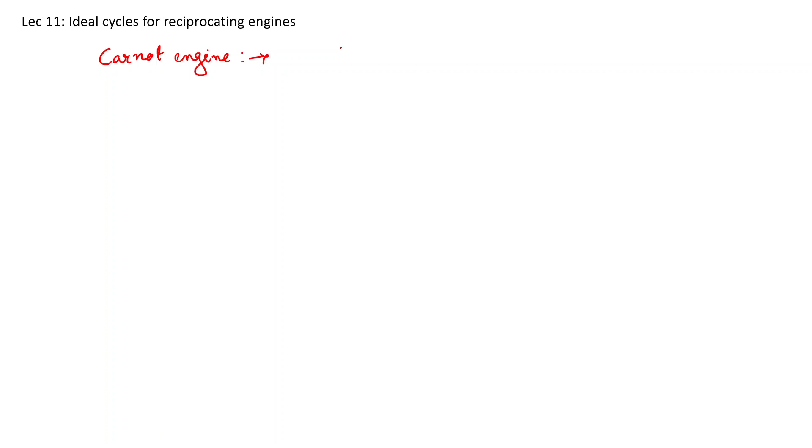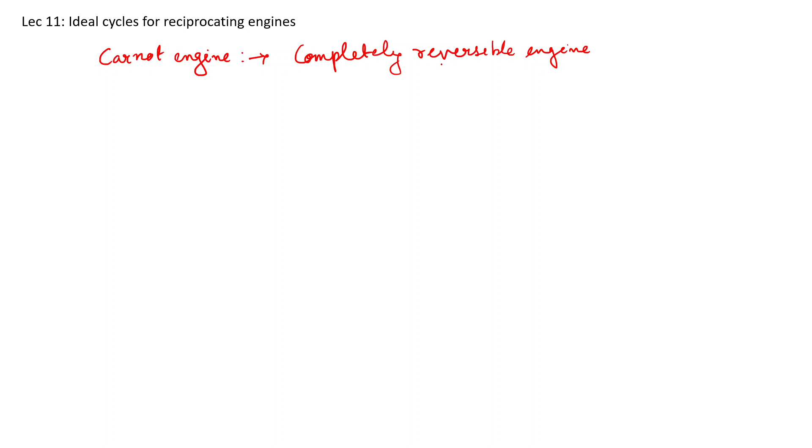When we are talking about ideal cycles, although we are not stating it, these are completely reversible. There are two types of irreversibility: internal irreversibility and external irreversibility, which has been discussed very vastly in the lectures covered by the instructor.

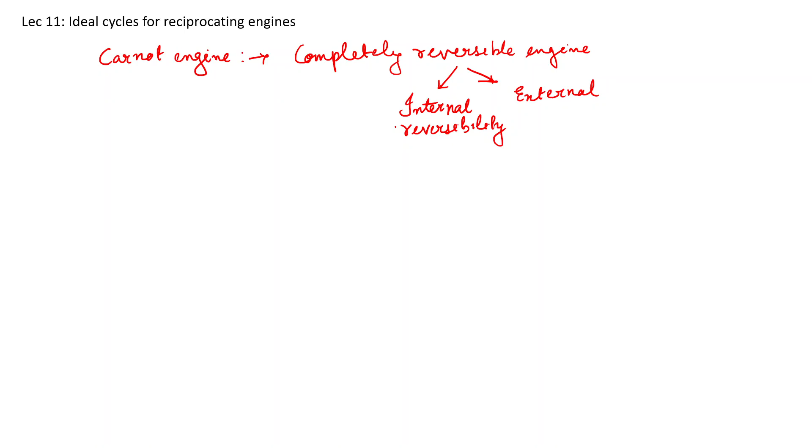Whenever we are not considering internal irreversibility in an engine, then there comes the ideal cycles, which has a presence of external irreversibility. Now, external irreversibility is due to the temperature difference existing between two bodies, which has a finite temperature difference.

Now, what will happen if there is a temperature difference? If there is a temperature difference, there will be a heat transfer, which will cause various forms of energy transfers. When we are talking about any reciprocating engine, there are various processes taking place which are not practically possible to identify. That is why we want to somehow replicate the actual cycles taking place in a reciprocating engine by replacing them with some ideal processes.

For example, the suction process may not be constant pressure. There might be other reversible or irreversible things, like pressure drop, or even heat transfer. But when we are talking about the ideal cycle, we don't consider all the irreversibilities. We neglect the internal irreversibility and try to identify the different performance parameters.

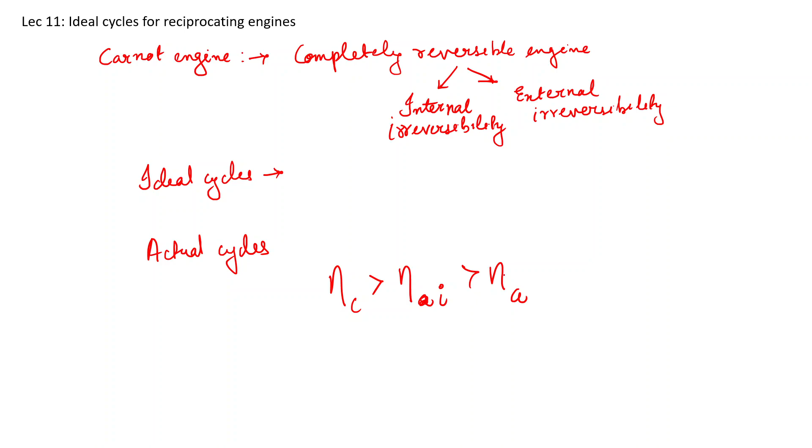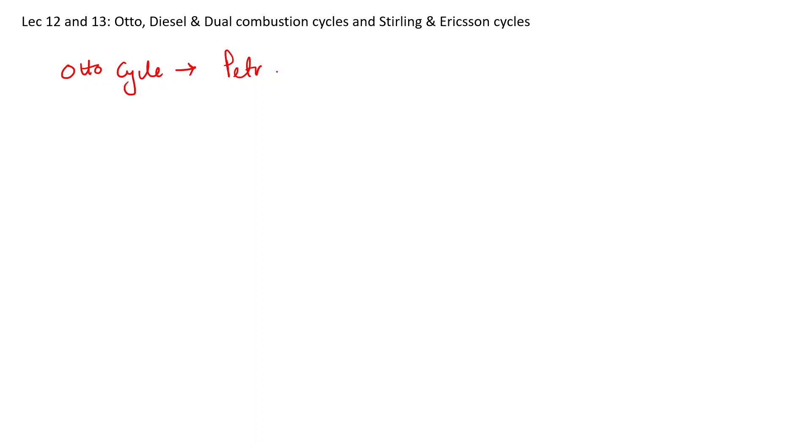Based on that, the different types of cycles we have discussed till now, in lecture number 12 and 13, the first one is an Otto cycle, which is generally found in the petrol engine or SI engine.

Then the other cycle is the diesel cycle. As the name suggests, it is used for the fuel diesel engine, also known as CI engine.

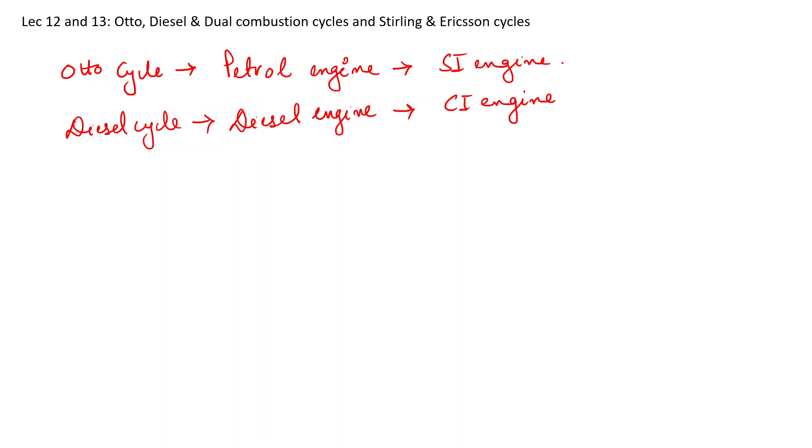The Otto cycle also has some disadvantages and some promising things. So when we combine the advantages and disadvantages of both the Otto and diesel cycle, we get another cycle known as the dual cycle, which will generally exist between the Otto cycle and the diesel cycle. These are the modern day engines.

Now, other than that, we have already discussed Stirling engines and Ericsson engines.

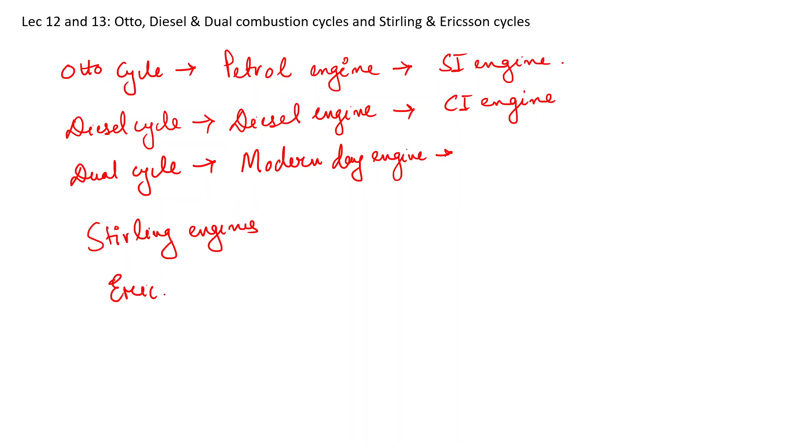Now, this type of engine is generally found in power cycles or whenever we are dealing with any huge reservoir, like a heat recovery system or renewable thermal systems. This type of engine cycle is used there. You can find more about this on Google by searching Stirling engines. You can find out that Stirling engines are also used in solar thermal power plants.

Now, what are the processes involved? I think you might already know this, but I'll brief them. There are two isentropic processes and two isobaric... sorry, isochoric processes. Petrol engine is isochoric, constant volume processes.

Now when it comes to the CI engine, the isentropic processes stay the same. In place of one of the isochoric processes, that is the heat addition, heat addition is done here using isobaric process, where the pressure stays constant.

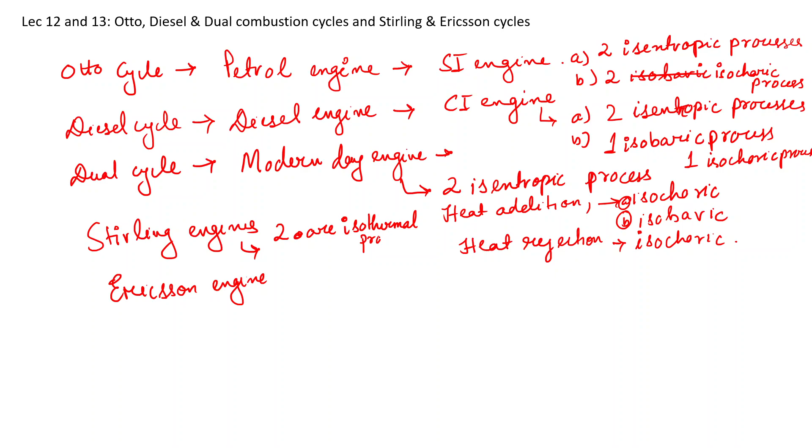Now the Stirling engine somewhat resembles the Carnot cycle, where two of the processes are isothermal and two are isochoric. Now, in place of the two isochoric processes, here the two are isobaric.

So these were all the things discussed this week, and based on that there were a few derivations done on how to identify the efficiency of these engines. Mostly we discussed Otto, diesel, and dual cycle, and after that we also saw how different state points can be found out, assuming these are air standard cycles and air is an ideal gas. We used ideal gas equations to identify the state points - temperature, pressure, and volume. Based on that, we find three or four important things: thermal efficiency, mean effective pressure, or specific volume. We'll be discussing these and solving a few numericals which will be helpful in understanding these types of cycles.

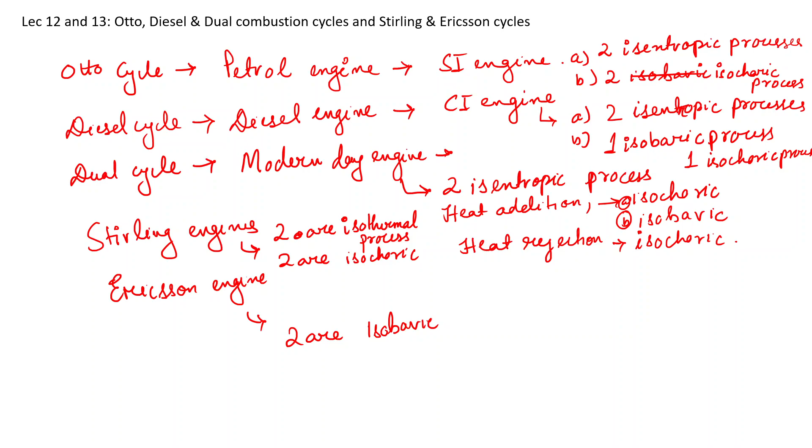Okay, so let's start solving the numericals. Okay, so can you see the screen?

The first question is: compression ratio of a reciprocating engine is defined as the ratio of... tell me. Maximum to minimum volume, sir. Correct.

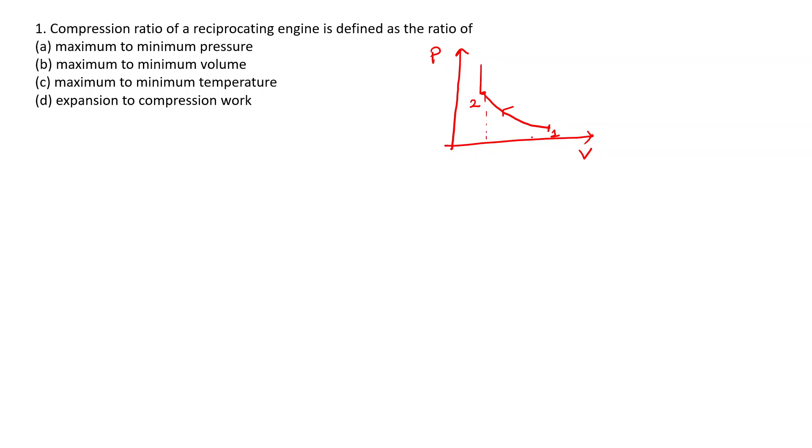This asks for any reciprocating engine, but for instance we can take an Otto cycle. If this is a P versus V curve for the Otto cycle, let's say first 1 to 2 is isentropic compression, where we reach from volume 1 to volume 2. Then the constant volume heat addition, then the isentropic expansion, then finally the isochoric heat rejection. Now V2, this much is VC, the clearance volume, and this part is Vs, the swept volume.

Based on that, we can also say that whenever we talk about any engine, if the piston is at its lowest point, that is BDC, and when it is at the highest point, that is TDC, and this much volume is the clearance volume - this has been discussed in the lecture as well. So the compression ratio is the ratio of the maximum volume, that is the volume at BDC, to the volume at TDC. So it is V1 by V2.

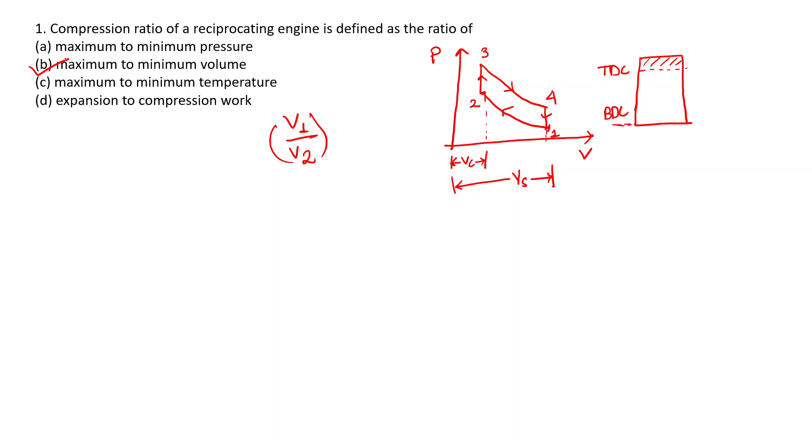So we'll move ahead. Okay sir. So the next question is: an Otto cycle is characterized by what? We have just discussed this. Isochoric heat addition and isochoric heat rejection. Correct.

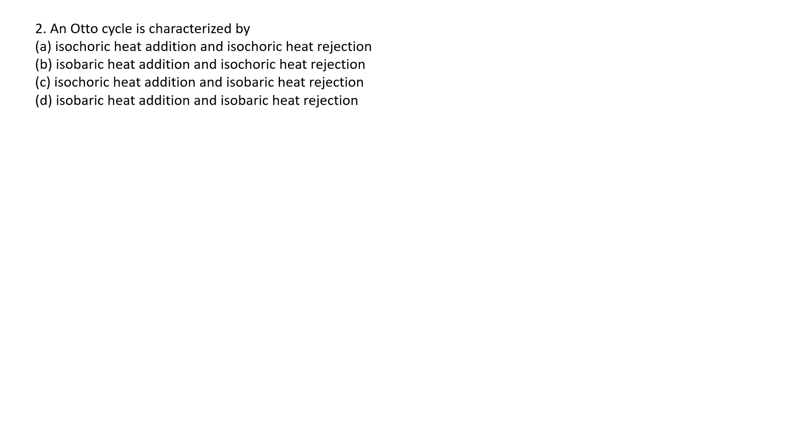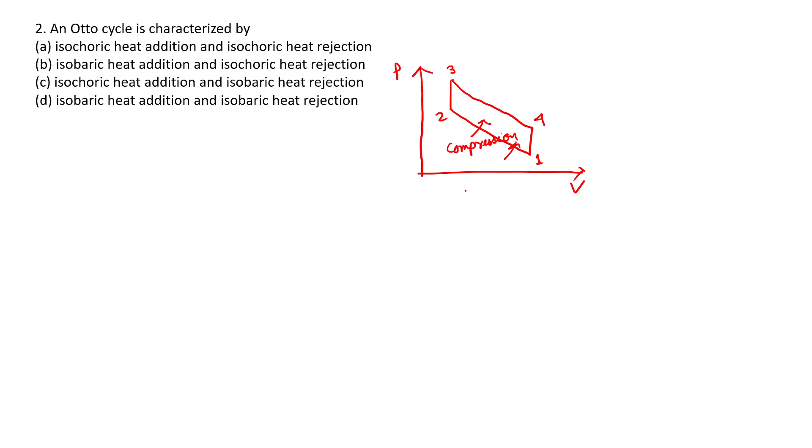I just drew the PV diagram of the Otto cycle. Now here there is compression, isentropic compression, where work will be done on the system. Then comes the heat addition - 2 to 3 is the isochoric heat addition term, where there is Q supply. Then comes the work done by the system - there will be expansion, isentropic expansion done by the system. Then finally heat will be rejected, and that is isochoric or constant volume heat rejection. This is all about the Otto cycle, and based on that, the correct option is isochoric heat addition and isochoric heat rejection, option A.

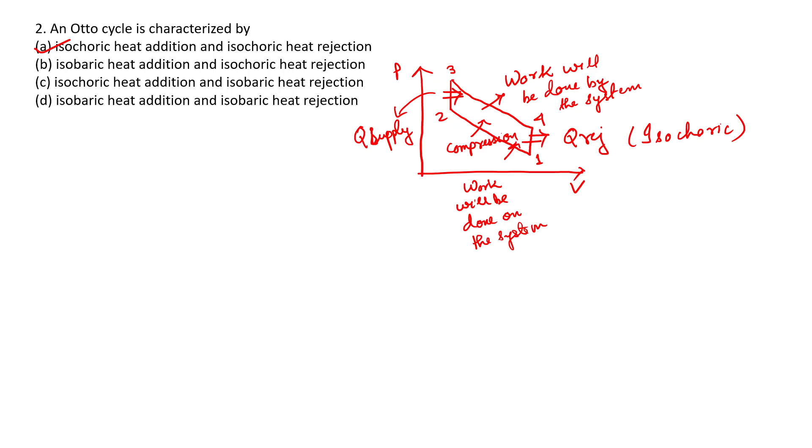So we'll move to the next question. Yeah, so the thermal efficiency of an Otto cycle is - if you remember the thermal efficiency formula, you can directly answer from that.

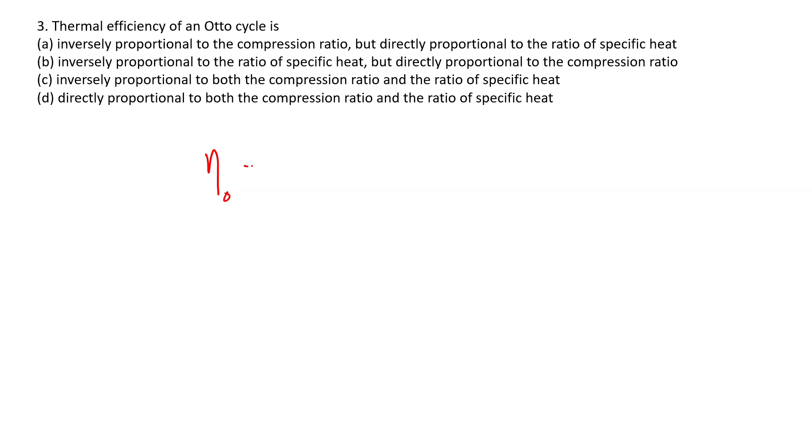Yes sir, that is 1 minus 1 by compression ratio power gamma minus 1. 1 by RC, let us say compression ratio is RC, gamma minus 1 by gamma.

Okay, so now tell me, for example, if you are increasing RC, what will happen to the efficiency of the Otto cycle?

Yes sir, gamma for a monoatomic gas is like 1.67.

So absolutely right. So already a graph was discussed, a plot where the x-axis has the RC and the y-axis has efficiency. Now RC cannot come below 1, so this is the curve that was discussed.

Okay, now along this gamma increases. This, as you said, is for gamma equal to 1.66, that is monoatomic gas. This is 1.4 and this is 1.3.

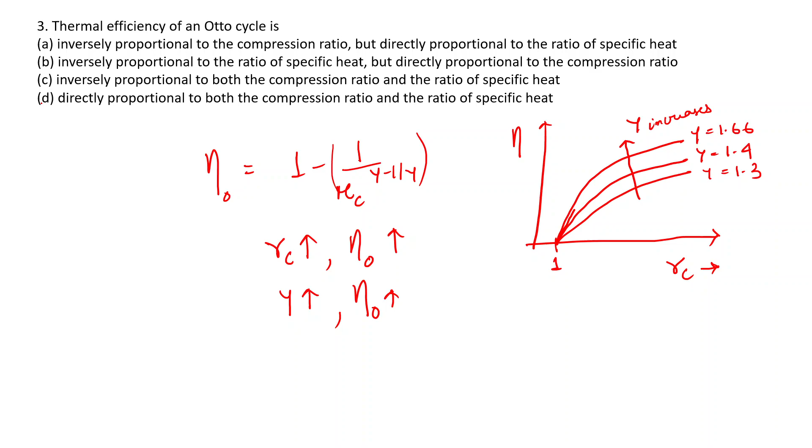Okay, that is one of the drawbacks, and based on that only we switch to diesel cycle. So the correct option is directly proportional to both compression ratio and the ratio of specific heats, that is gamma.

Question number 4: just now we discussed, an Ericsson cycle comprises of what? Two isothermal and two isobaric processes. Correct. So 2 isothermal and 2 isobaric processes I have already discussed, and you can refer to lecture number 13 to understand more about it.

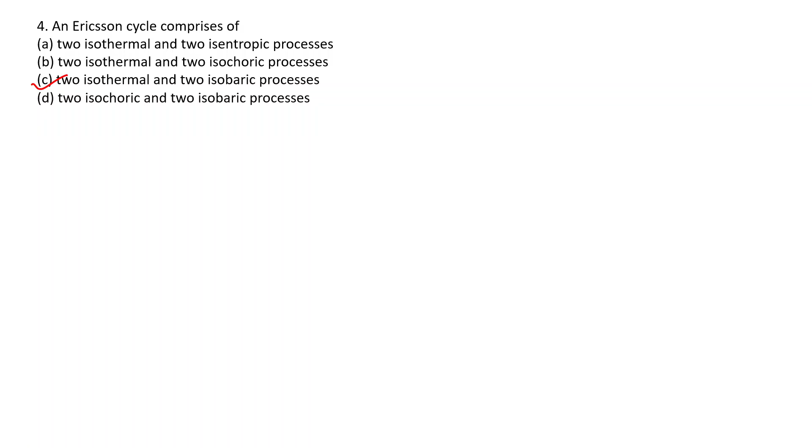Now coming to solving few numericals, let's start with question number 5. An engine running on Otto cycle receives air at 85 kilopascal, 280 Kelvin, with the maximum cycle pressure and temperature as 5 megapascal and 2000 Kelvin respectively. The temperature at the end of the expansion stroke is dash Kelvin. So try to solve this question, and then we can discuss what value you got.

In this problem, shall I take P2, pressure after compression, which is equal to square root of P1 P3? For Otto cycle, is it applicable sir? That can only be applicable when the condition is that you are talking about when there is minimum compression work. I think that formula, root over P1 and P3, is used in a compressor.

Okay, so here you can't use that formula because no such consideration has been mentioned in the question. So you have to start by using the state points. What are the state points? Whenever such a question is given, consider what state points have been provided and what information I can derive from the question. The third thing is, based on that, what missing state points do I need to find out. After that, you can find out the efficiency or whatever it is asking. So just go step by step, you will be able to answer this question.

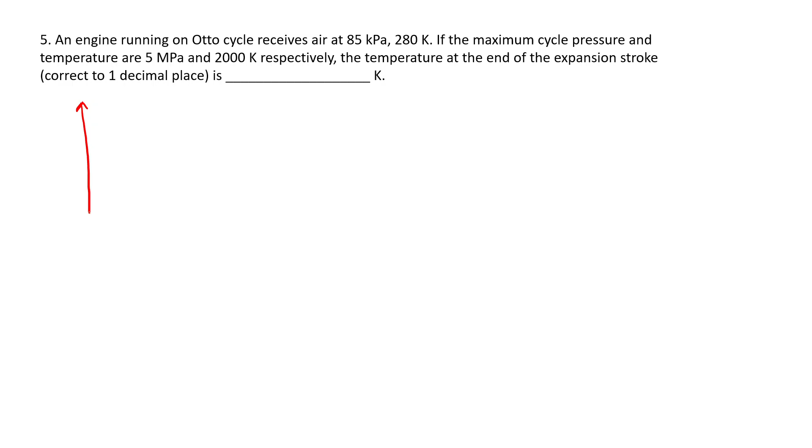Okay then, I will solve this question. So what are the hints we have to find out? First of all, as I said, draw the curve, either whatever you are comfortable with, whether it's P versus V or T versus S.

Okay, so at state point 1, P1 is equal to 85 kilopascal, T1 is equal to 280 Kelvin. These are the things that have been given.

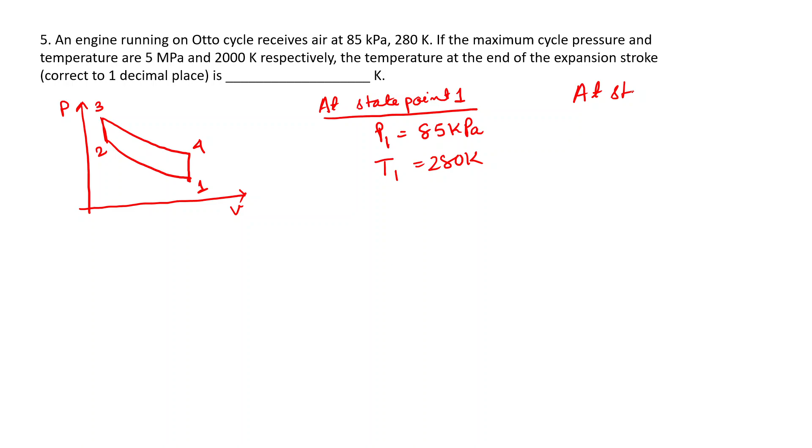At state point 3, P3 is equal to 5 megapascal or 5000 kilopascal, T3 is equal to 2000 Kelvin. It is asking what is the unknown, it is asking what is T4.

Now, one of the hints you might have skipped is the Otto cycle term. What does Otto cycle mean? That means V2 is equal to V3. This gives a very important relation, that is P2 by T2 is equal to P3 by T3. Similarly, V3, V4 is equal to V1.

So P4 by T4 is equal to P1 by T1. Okay, now let's find what is T2.

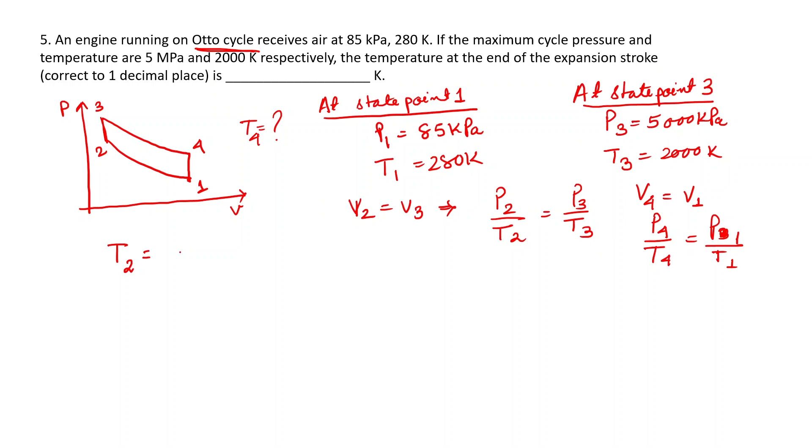Now T2 is equal to, we'll use the adiabatic equation, PV to the power gamma is equal to constant. If you cannot remember the equation, just remember PV to the power gamma is equal to constant. Based on that, replace P with V with respect to T and P relation: T by P to the power gamma minus 1 over gamma is equal to constant.

So that implies T2 by T1 is equal to P2 by P1 to the power gamma minus 1 by gamma. So T2 will be T1 into P2 by P1 to the power gamma minus 1 by gamma.

Now in this case, we don't know what is T2, we also don't know what is P2. Okay, that's fine. But what we know is T1 and P1. Now coming to the next equation.

That is P2 by T2 is equal to P3 by T3. So in place of P2, just write P2, and in place of T2, replace with this equation: T1 into P2 by P1 to the power gamma minus 1 by gamma is equal to P3. Do we have P3? Yes, we have P3, it is 5000.

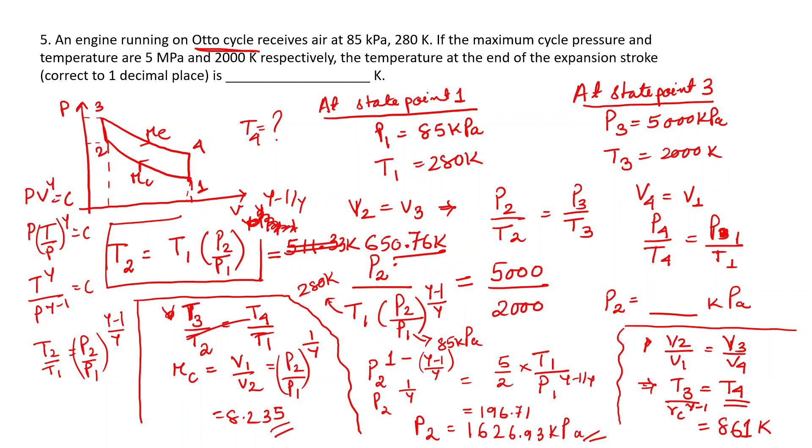Okay, so this is how we solve it, just go step by step. Now question number 6: A gasoline engine with a compression ratio of 10 receives air at 50 kilopascal, 280 Kelvin. Temperature at the expansion stroke is 750 Kelvin. If air can be assumed to be an ideal gas with R equal to 0.287, find the mean effective pressure of this cycle. I think you can give it a try.

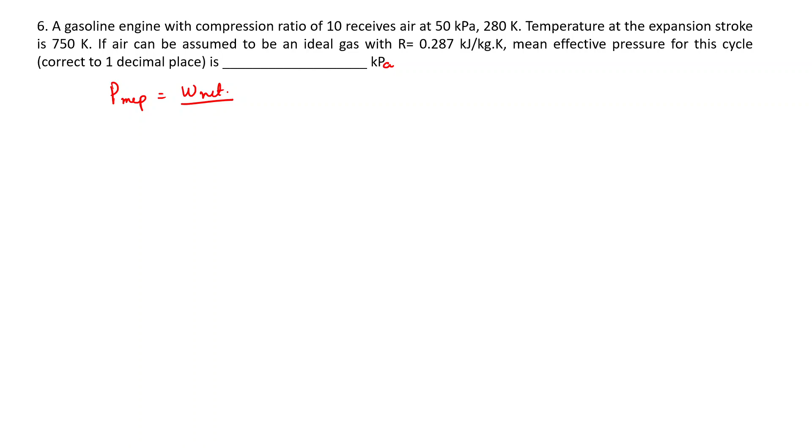As per the mean effective pressure definition, that is equal to net work done divided by V1 minus V2. Not only work done, net work done, because net divided by Vs, or you can write W net by V1 minus V2. This is the swept volume.

Here heat supplied minus heat rejected: CV into T3 minus T2 for finding the heat supplied. Meanwhile heat rejected is CV into T4 minus T1. We need to find the salient state points. Let's go for it.

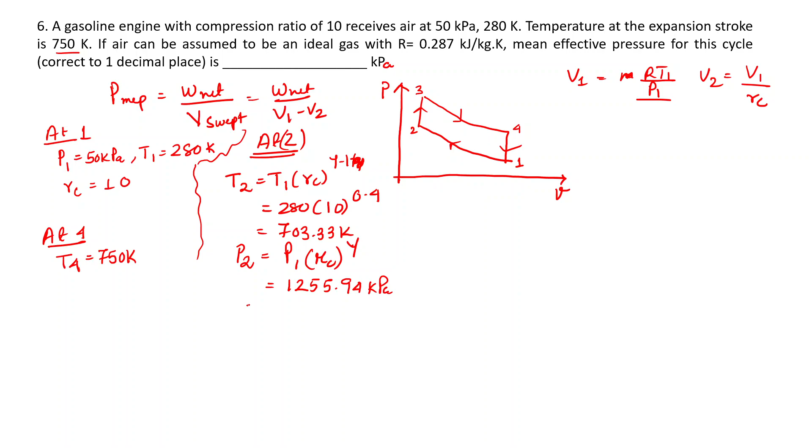1255.94 kilopascal. So based on the information we calculated, what are the state points at 2?

One more thing we can calculate now is V1, the specific volume at state point 1. We calculate it by RT1 by P1, where R is not the universal gas constant but the universal gas constant divided by the molecular mass of air, which is given as 0.287. So 0.287 into T1, which is 280 Kelvin, divided by P1, which is 50 kilopascal, gives 1.6072 meter cube per kg.

Let us take 1.6072 as 1.61 meter cube per kg. From here can you calculate V2? Of course you can. It is 0.16 meter cube per kg.

Now the effective mean pressure is W net by V swept, that is V1 minus V2. So V1 and V2 we have, we need to find W net. One of the easiest ways to find it is to find efficiency, because this is an Otto cycle.

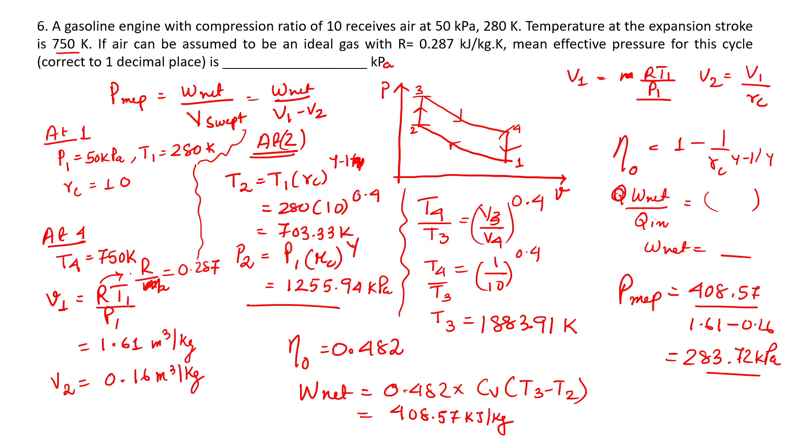Now coming to the next question. An Otto cycle with a compression ratio of 10 receives air at 290 Kelvin and 85 kilopascal. If the peak pressure is 6000 kilopascal, find its highest temperature. Almost similar question, try to solve it, then I will solve.

First step, draw the curve, okay sir. Yeah, first step draw the curve. I am comfortable with the PV curve, so whatever you are comfortable with, just draw that.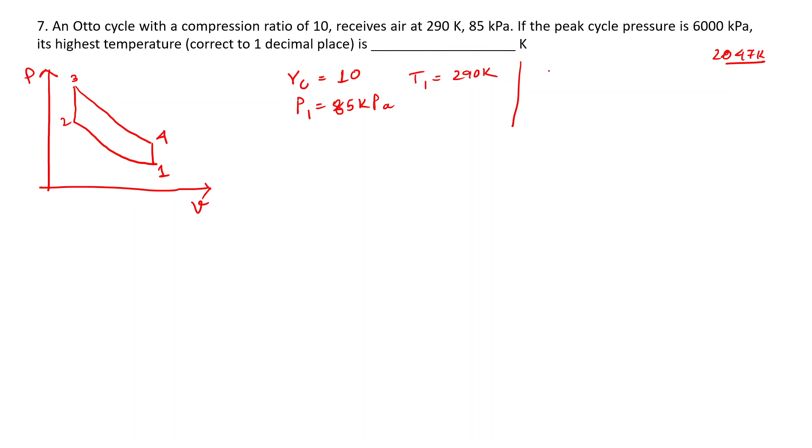So in an Otto cycle, where is the peak pressure? We see it at state point 3. So at P3 it is saying 6000 kilopascal. So it's the same question, we have some of the salient features or state points missing.

So let's start with finding out what we need, which is T3. So start with finding T2. T2 is, we have already developed this formula, RC to the power gamma minus 1. So T1 is 290 Kelvin, RC is 10 to the power 0.4.

If possible, try to remember this, because mostly whenever you get any Otto cycle question, the compression ratio is 10. So it's better to remember what 10 to the power 0.4 is, then your calculation will be really fast.

So it is around 2.5, 2.51, or you can just remember 2.5. So into 290, I am getting 728, 728.44 Kelvin, correct? Now once T2 is done, we need to find out T3.

So it is constant volume process. So T3 by T2 is equal to P3 by P2. Do we have P2? We don't know P2. Now how to find out P2? P2 is P1 into

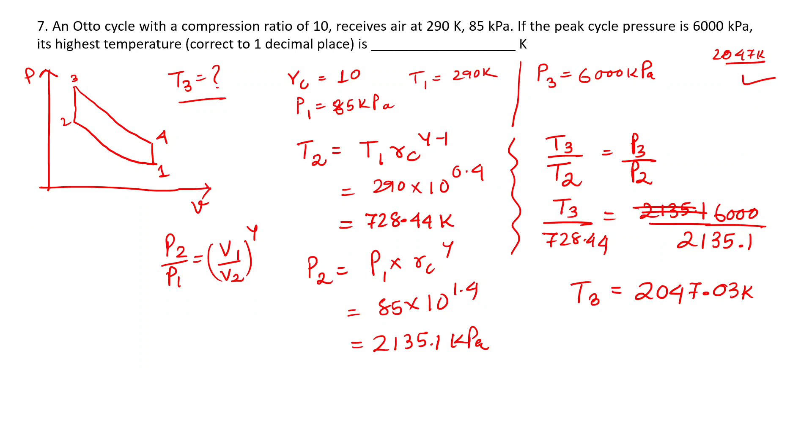Now coming to the next question. A diesel cycle has a compression ratio of 20 with an inlet state of 95 kilopascal, 290 Kelvin, and a maximum cycle temperature of 1800 Kelvin. If air can be assumed to be an ideal gas with R equal to this one and CV equal to this, find the net specific work output.

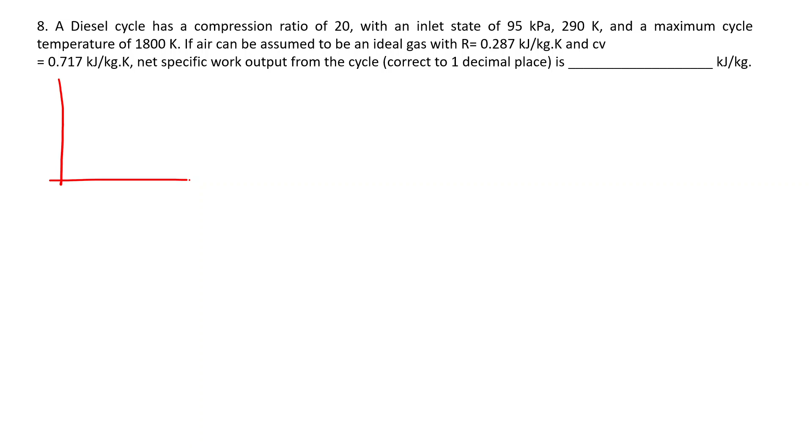Given are compression ratio RC is equal to 20, which is V1 by V2, with an inlet state given at state point 1: P1 equal to 95 kilopascal, T1 is equal to 290 Kelvin, and a maximum cycle temperature.

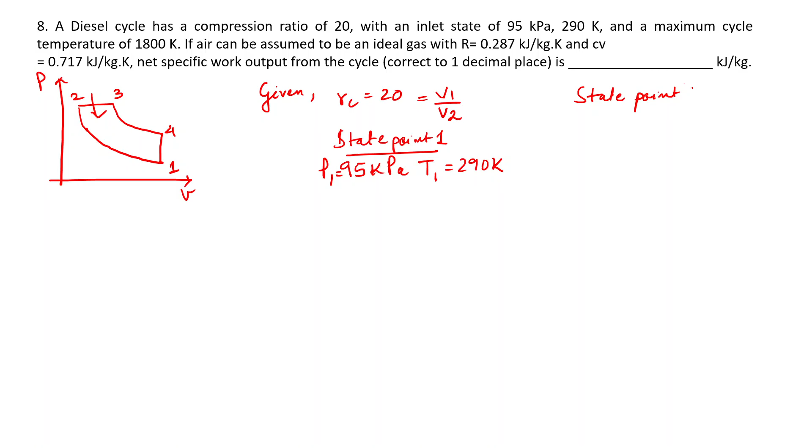So where do you think the maximum temperature will be observed? T3, sir. Correct, because heat addition is taking place there, so it will be 1800 Kelvin. Now, if air can be assumed to be an ideal gas with R equal to 0.287, it is given. Okay, these are all we know. CV is equal to 0.717, it is given.

Fine, the net specific work output, so W net we have to find out. If the cutoff ratio would have been given, then it would have become very easy for us, because we have T3, we would find out T2, then directly T3 minus T2 into CP, then we would get Q in, and from that the net specific work output can be found out. As it is not given, we need to find out Q rejected as well. So find out, this is a bit lengthier question.

Try to find out. Even we can, yes sir, trying sir. Start with T2 equals T1, RC to the power gamma minus 1.

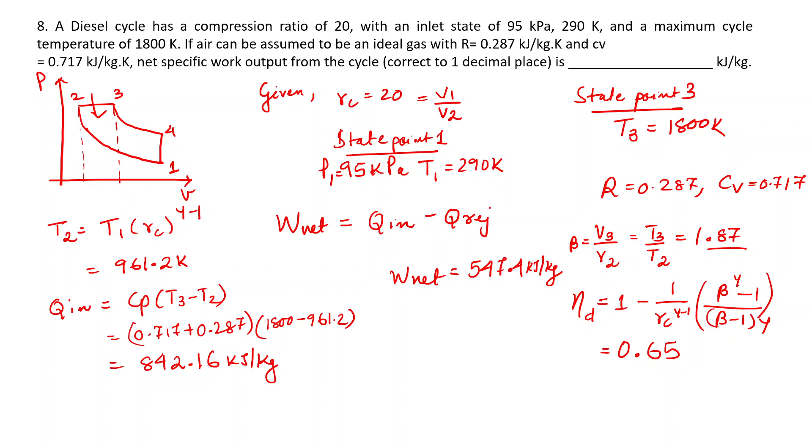Then we'll go to the next question. A diesel engine receives air before compression at 280 Kelvin and 85 kilopascal. The highest temperature and pressure in the cycle are 2200 Kelvin and 6 megapascal. If air can be assumed to be an ideal gas with R equal to 0.287 and CV equal to this, find the mean effective pressure of the cycle. So almost similar question, just try it, try to solve it fast. I will just tell the approach.

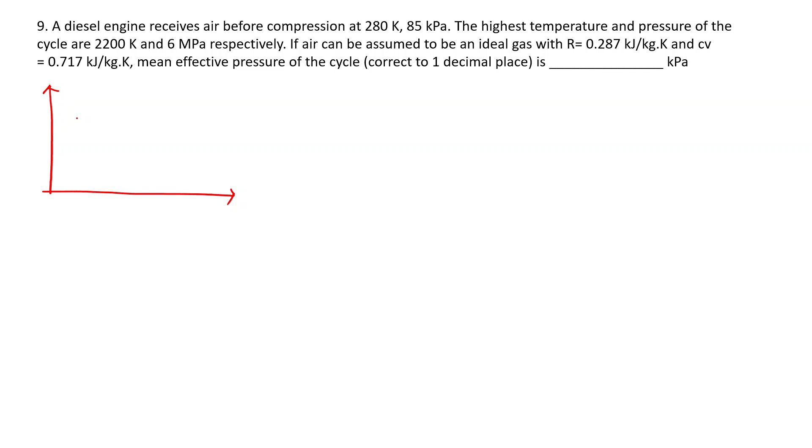Are you solving? Yes, sir. For this problem, beta, I'm getting around 2.34, sir. Whether it is a logical answer, sir? Beta, yeah, might be 2.34. Yeah, no problem, you can go ahead.

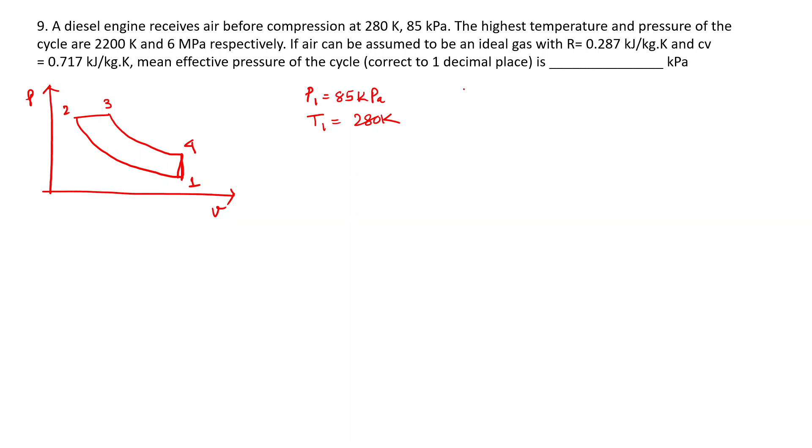So here it is given that before compression, that is P1. P1 is 85 kilopascal, T1 is 280 Kelvin. The highest temperature and pressure are, so of course it is P3 and T3: 6 megapascal, 6000 kilopascal, and 2200 Kelvin. If the air can be assumed to be an ideal gas with R equal to this and this, find the mean effective pressure.

Now for that, do we have the compression ratio? Compression ratio is not given. For that, we need to find out T3, T2. Compression ratio is around 21. So it is not given, but we are already given P3.

So in a diesel cycle, this is the another hint. P2 is equal to P3, which is 6000 kilopascal. So V1 by V2 is equal to RC is equal to P2 by P1 to the power 1 by gamma. That is P2 is 6000 by P1 is 85 to the power 1 by 1.4. 20.91 I'm getting. So you are also getting 21.

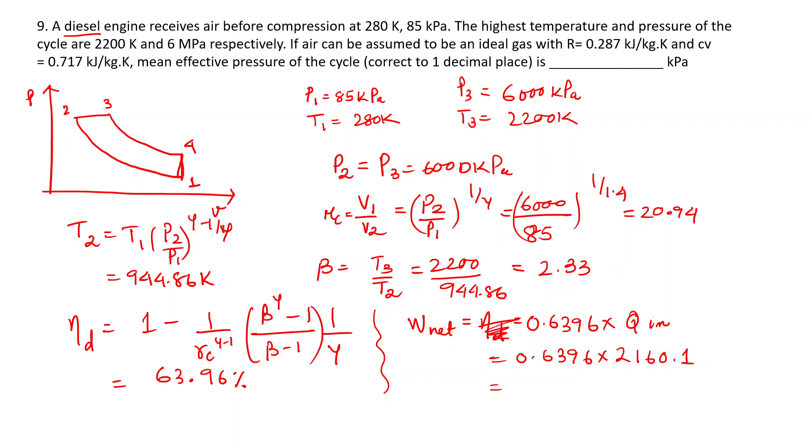Okay, 1.004 into 2200 minus 944.86. It is 1260.2, right? 1260, okay, correct sir. Okay, 1260.16 into 0.6396, it's 805. Yes, sir, 805.99 kilojoule per kilogram.

Then find out W net by V1 minus V2. What is V1? RT1 by P1, 0.945. 0.945, correct, meter cube per kg.

V2 is 0.0945. Sorry, V2 is how much? 20, we are getting, sorry, I just took it as 10. Yeah, so 20.94, it is 0.045. Am I right? Yes. Correct, sir, correct.

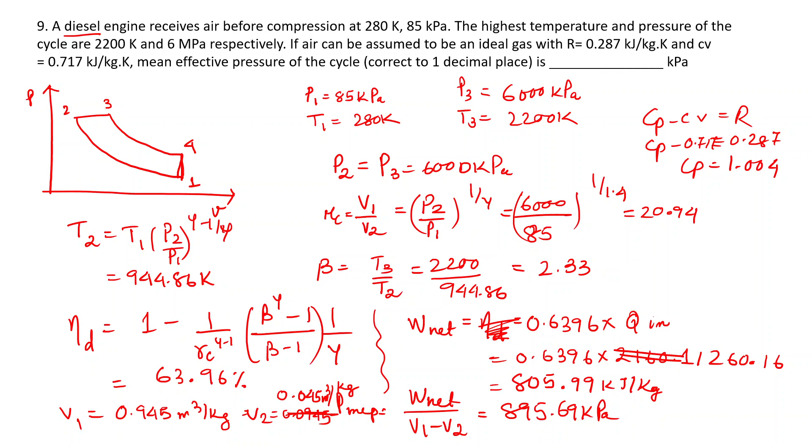This is a question on the dual cycle. A cycle working on ideal dual combustion cycle receives two-thirds of the total heat supply at constant volume and the rest at constant pressure. It has a compression ratio of 9. State at the beginning of compression: 90 kilopascal and 20 degrees Celsius, and it receives 2100 kilojoule of heat per kg of working fluid. If air can be assumed an ideal gas with R equal to 0.287 and CV 0.717, find the thermal efficiency of the cycle.

So I think if you can remember the formula for the dual cycle, that makes it very easy. But as that formula is a little lengthy, remembering it is difficult. So you can directly go with the same process that we have been following till now. Just find out all the required state points. This is 1, this is 2, this is 3, this is 4, this is 5.

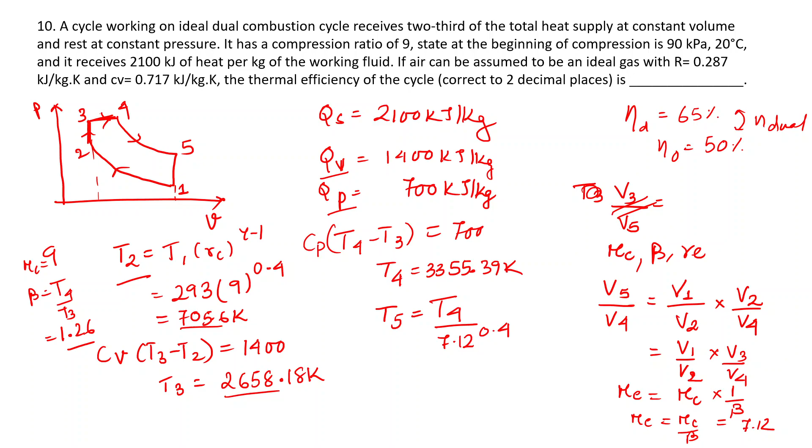So T4 divided by 7.12 to the power gamma minus 1, that is 0.4, inverse, into T4 which is 3355.39, I am getting 1529.35. Correct.

Now Q rejected is CV into 1529.35 minus the initial temperature, which is given as 293, so around 886.47 kilojoule per kg.

So Q rejected is done. Just subtract this from 2100, divide by 2100, so efficiency is coming around 57.78%. Correct?

So these are all the types of questions that has been discussed. Now we'll solve 2-3 more types of numericals, out of which I think one is a new type.

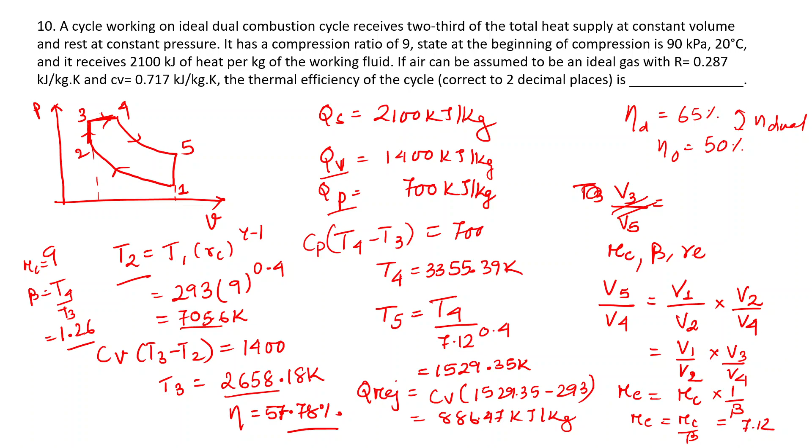Let's see. Question number 11: a gas engine operating on the ideal Otto cycle has a compression ratio of 6:1, so RC is given as 6:1. The pressure and temperature at the commencement of compression, that is at the beginning, are P1 = 1 bar, T1 = 300 Kelvin.

Heat added during constant volume combustion process, QS, since it's only an Otto cycle, the total heat addition is 1170 kilojoule per kg. You determine the peak pressure, temperature, work output per kg, and air standard efficiency.

Of course this type of question we have already done. I will just walk through the approach again. Solve this question yourself. Okay, 1, 2, 3, 4 - just draw the curve.

Now we have to find out P2. So how to find out P2? P2 is nothing but P1 times RC to the power gamma. Okay, we will get P2.

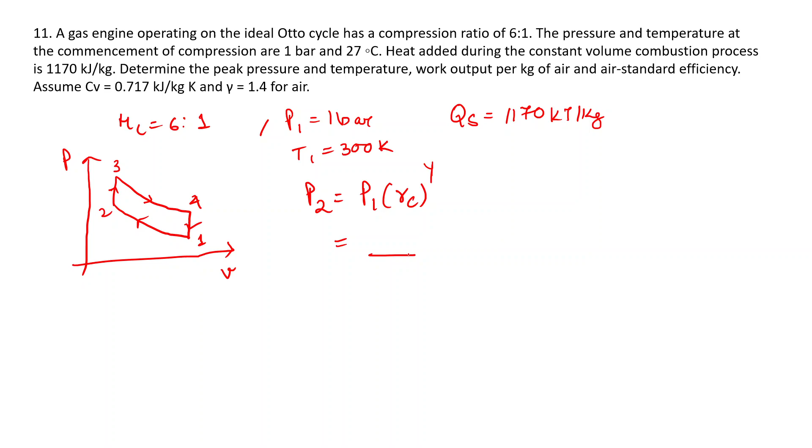Once P2 is done, we will find out T2. Do we need T2? No, wait, I think we need to find out T2. So from here, find T1 times RC to the power gamma minus 1. T1 is given as 300 Kelvin, RC is 6 to the power 0.4. I think 6 to the power 0.4 is okay, 300 times that is somewhat around...

614.3 Kelvin. Now once that is done, Cv times T3 minus T2 equals 1170 kilojoule per kg. Now find out T3 from here. It is somewhat around 2246 Kelvin, sir - 1170 divided by 0.717 plus 614.3 gives 2246, right? Yes sir, so T3 is done.

Now once T3 is done, we know this is an Otto cycle with constant volume heat addition, so P3 by P2 equals T3 by T2. From here find out P3. So T3 we have got, T2 we have got...

614.3, and P2 we have got how much? 1 bar it is given, so 1 bar is 10 to the power 5 Pascal, that is 100 kilopascal. 100 into RC is 6 to the power 1.4... T4 around 1097.

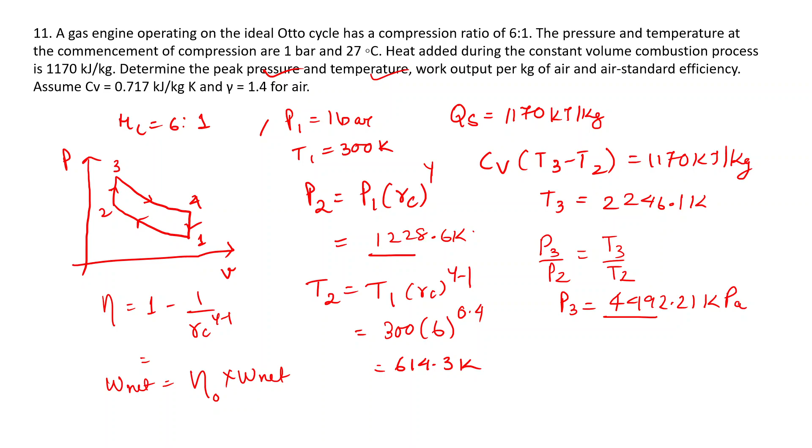Okay, so once that is done, I think this type of questions we have already done. Question number 12, I think this is somewhat a new type of question: determine the ideal efficiency of the diesel engine having a cylinder with bore - bore means the diameter of the cylinder, piston, mostly the cylinder in which the piston is reciprocating.

It's 250 mm. Stroke, the total length in which it travels, is 375 mm. And a clearance volume is 1500 cc, with the fuel cutoff occurring at 5% of the stroke. Okay, 5% of the stroke.

So stroke Vs is V1 minus V2. Okay, find first the stroke volume. Vs equals pi by 4 d square into L. So convert pi by 4 into cc, that will be easier for you. So 25 into 37.5. What, you want to say something?

No sir, doing it sir, doing it. So it is 25 whole square into 37.5 into 0.785. I think you will get 18,398. Calculate how much you are getting.

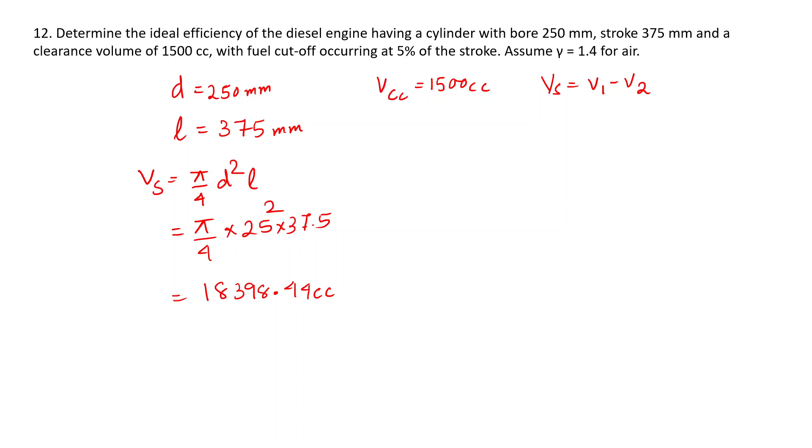Sir, 18,407. Okay, I think pi by 4, little bit of variation due to pi by 4, that's okay. So V1 is equal to Vs plus V2. So Vs is 18,398.44 plus V2 is 1500, as I've already said, V2 is the clearance volume, plus 1500 is...

19,898 cc. Now the best way to solve this question is using a graph that will really simplify it, but the expression that is being developed from this question, try to remember it, that will help you where there might be some questions in competitive exams where you don't have time to develop this equation. So remember that equation for solving. So it is PV, somewhat like this, 1, 2, 3, 4.

So it is saying that fuel cutoff occurs at 5% of the stroke. Fuel occurring is here, heat addition takes place here because compression has ended. Now air is at its maximum temperature, at least at a temperature at which whenever fuel is introduced, combustion and heat addition will take place. The fuel cutoff will take place at V3. So normally it is saying that V3 minus V2 equals 5% of the stroke.

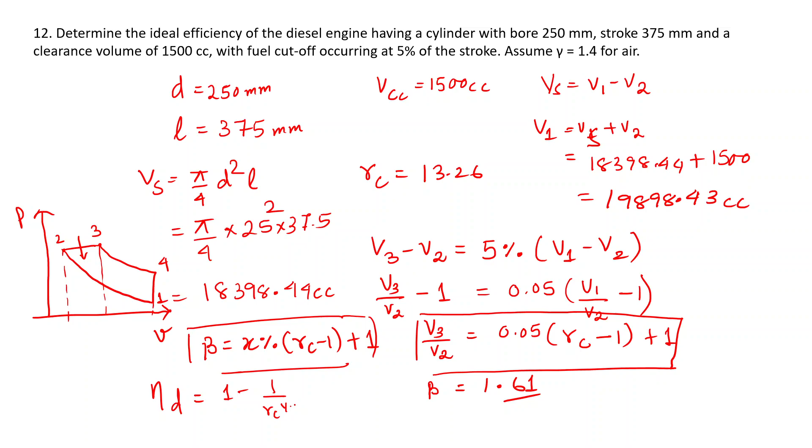So 13.26 is RC. Beta equals 0.05 times (RC minus 1) plus 1. I'm getting 1.61. Correct. So beta is there, RC is there. Can you calculate efficiency? Around 60.54%, I'm getting 60.605. So hopefully you will get around 60.50.

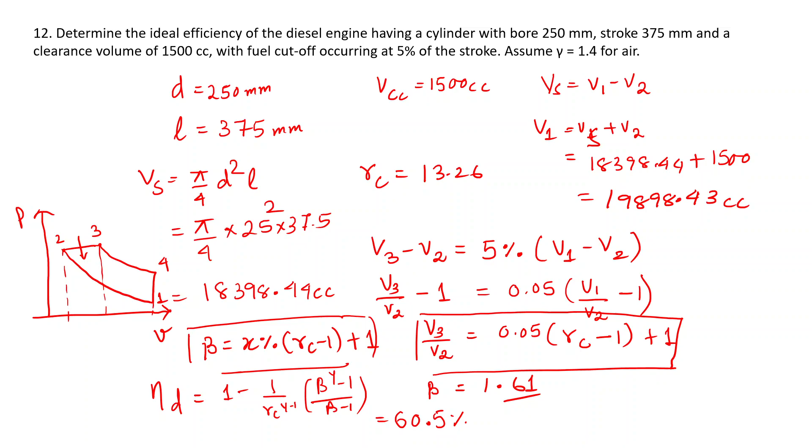I'm leaving it to you, I think this is very simple. Once you have beta and RC, you can calculate that. Okay, now coming to the last question.

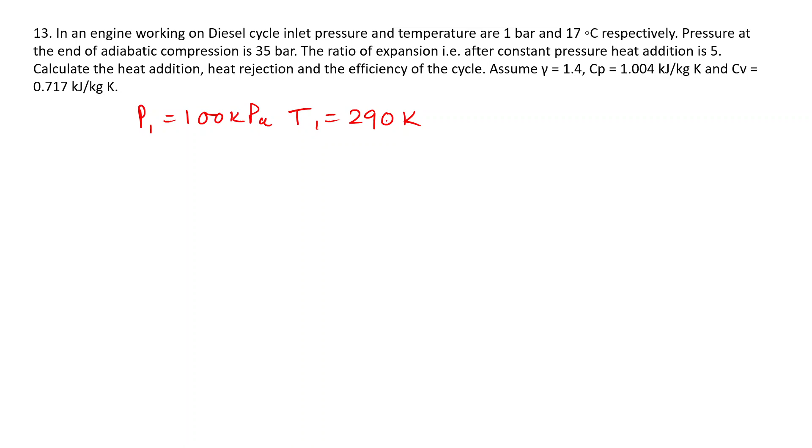In an engine working on a diesel cycle, the inlet pressure and temperature are 1 bar and 17 degrees Celsius. So P1 is given as 1 bar, which is 100 kilopascal, T1 is 290 Kelvin. Pressure at the end of adiabatic compression, P2, is given as 35 bar. The ratio of expansion, after constant pressure heat addition, is 5.

So it is V5 by V4. V5 is the highest, so V5/V4 is 5, it is given, which is RE. Calculate the heat addition. But sir, this is only a diesel cycle, does V5 come in, sir? Sorry, okay, okay, I got it, sorry.

Okay, I will just do it. So 1, 2, 3, 4. So it is V4 by V3, correct? Am I right? Yeah, yeah. So we have already developed this equation, the relation between beta, RC and RE. What is that relation?

Expansion ratio equals compression ratio divided by cutoff ratio beta. So what is the compression ratio? It is 35 by 1 to the power 1 by gamma. So 35 to the power 1 divided by... I think 12.67 I'm getting.

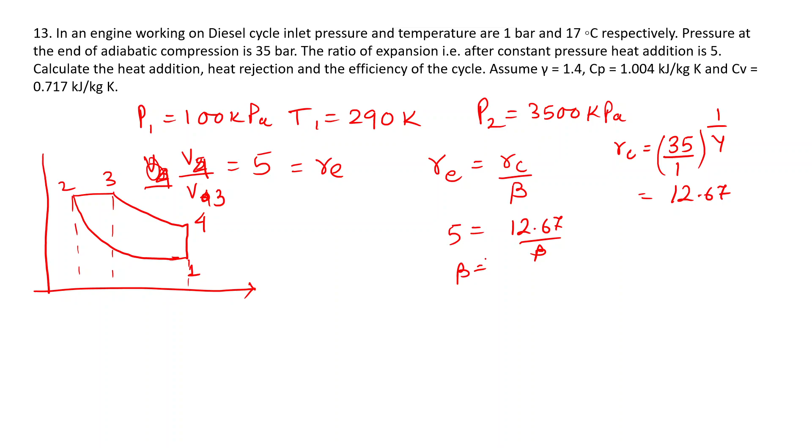Yes sir, so 12.67 by beta equals 5. So beta equals 12.67 by 5, you will get 2.53 as beta.

Now once that is done, heat addition you can calculate as Cp(T3 minus T2). You have all the values; T2 you can calculate from the compression ratio, T3 you can calculate since the constant pressure thing is given, and with the expansion ratio 5 given, you can also find T4.

Okay, and once all the values are found out, heat addition is this, heat rejection is Cv(T3... T4 minus T1), and the efficiency of course you can calculate now itself using QS minus Q-rejected by QS, or whatever formula we have.

Okay, did you understand this question? I think we have already done this type of question, just the values differ. Yes sir, the difference in the given data, maybe the change in what is given is changed, so based on that you can find out.